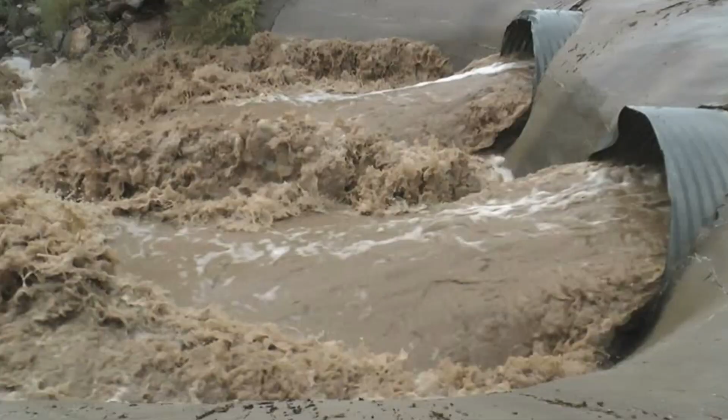The rain starts somewhere. We know it rains, it hits the ground, and it's going to go somewhere. If that's not controlled, there are problems. The steps that have been happening through erosion control have been phenomenal over the last 15, 20 years. But sediment control must be addressed too. The more dirt there is in the water, the more erosion that can happen, the more erosion control that is needed. Over the last few years there have been increased guidelines and regulations in the industry where we have to do better, we have to do more.

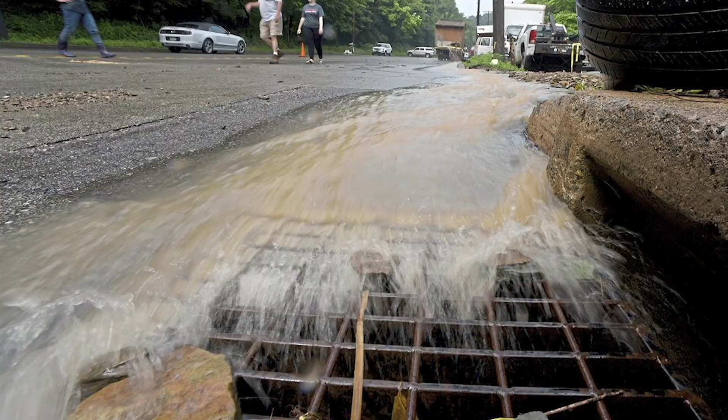Aside from the crying need for greater and cleaner stormwater control practices, sediment is the largest single non-point pollutant and the primary factor in the deterioration of surface water quality. It causes clogged stream channels, increased bank erosion, meandering and flooding. Sediment reduces the storage capacity of reservoirs. It destroys wetlands and degrades the quality of water for municipal, industrial, and recreational uses.

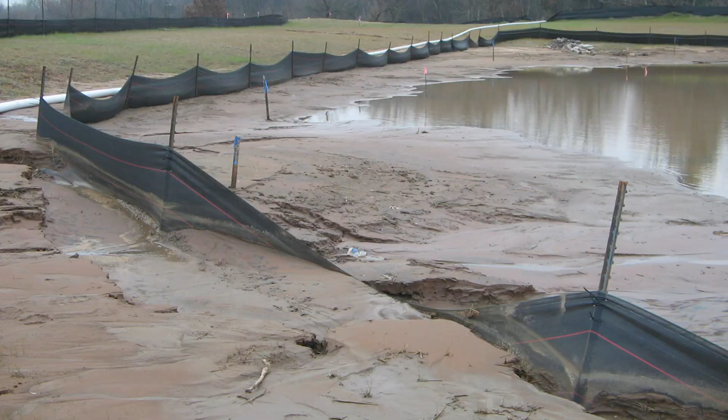Clean gravel stream beds become muddy bottoms. Native fish, insects, animals, they disappear. Turbidity and suspended solids are toxic to aquatic organisms. Oxygen-producing plants die off. Water temperatures increase. These are some of the attempts that have been accepted and approved that are in place following larger storms and stuff that they can't handle. So we've done a lot of great things to a point. The cry and call now is we need to go more.

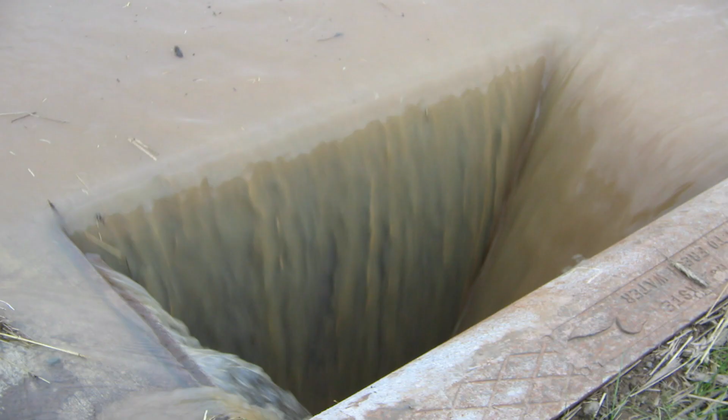This was a concrete washout that was left uncontrolled going into an inlet protection. We put our undergrade inlet EZ Catch system in there and took care of the turbidity. You'd still have to deal with the pH, but we now have a concrete washout system where you can treat the slurry and release it on site clean.

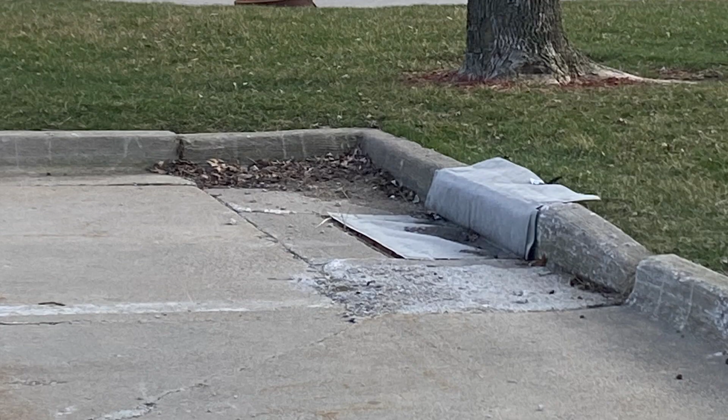You have to retain your stormwater. You have reservoirs, you have basins, etc. Once you've successfully retained your stormwater on site, you have the high NTU levels, the phosphorus, the nitrates, and other additives that are in that. So we need to clean that before it gets there, or you have to keep dredging it out, creating more and more space and room for your products. That can be done through my products with the sediment control factor.

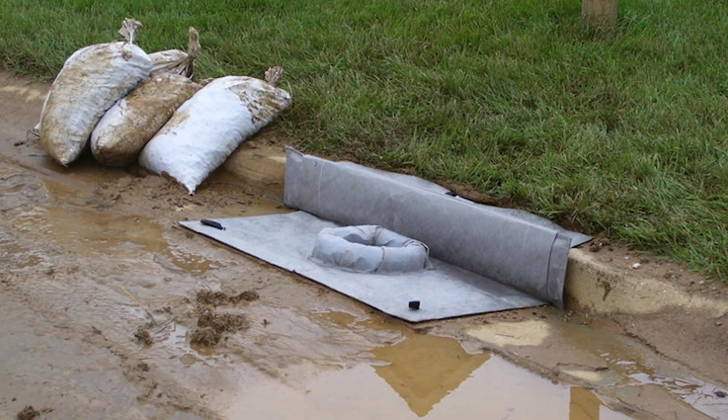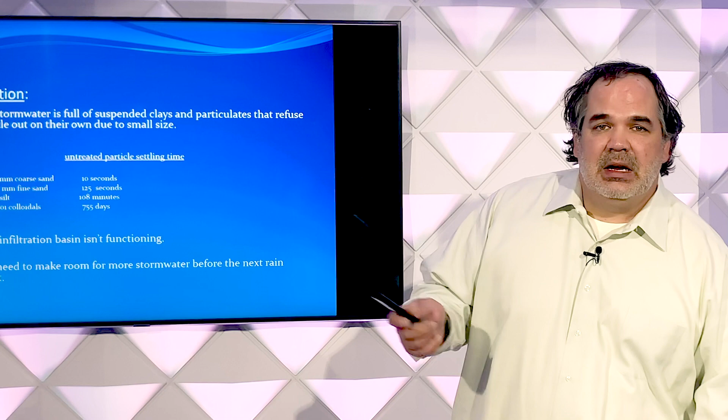You can combine flocculants and chemicals and other things to make it settle better, but that is something done at the engineer level. Your stormwater is full of suspended clays and particulates. They all take a different amount of time to settle. And then when it rains, et cetera, it's going to resettle and resettle. So if we can keep it out of there, again, it's greater for the impact when it keeps going on to our bodies of water, rivers, lakes, and streams.

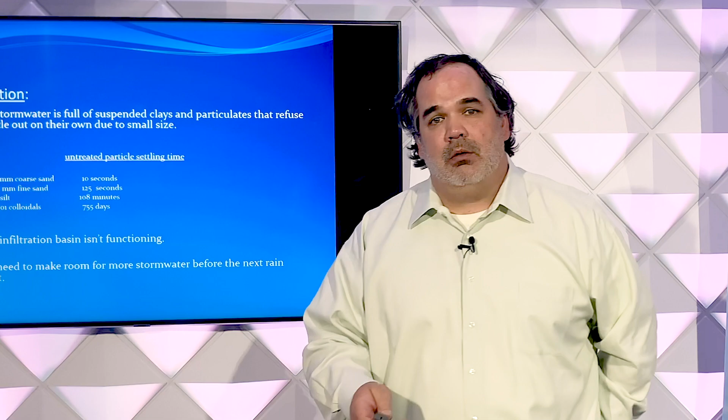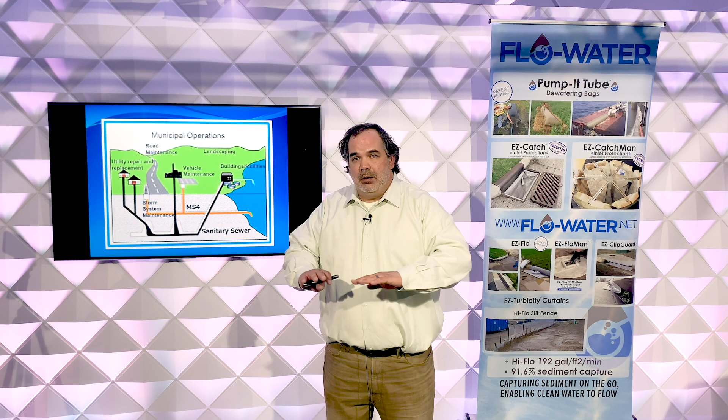Municipal operations. I'm going to get into post-construction solutions where you can protect your underground infrastructures that we're all spending millions and more on from having to get cleaned out as much and repaired as much, on top of keeping that out of the bodies of water, et cetera, where it's ultimately going to go when you get larger rain events and they go over those flood protection walls.

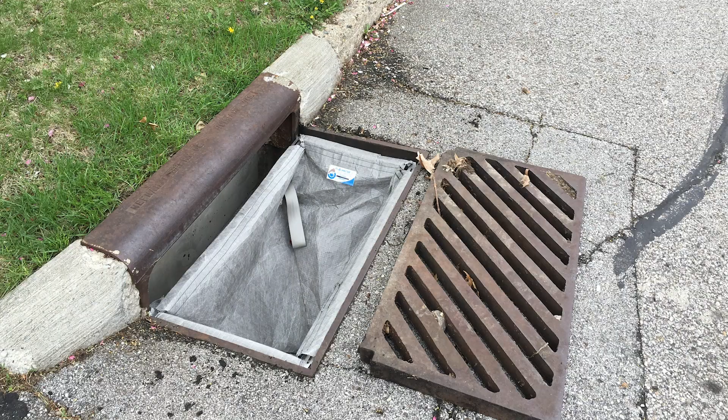Below-grade inlet protection. Flo-Water's EZ-Catch Inlet Protection is our patented products that adjust. This is our EZ-CatchMan. It handles manholes, beehives, et cetera, that are round. Two sizes handle from 15-inch in diameter to 37-inch in diameter. Adjusting tabs in the corners go between the grate and frame, so you're not rebuilding the grate, you're working with it. Reinforced straps you lift the bag out with.

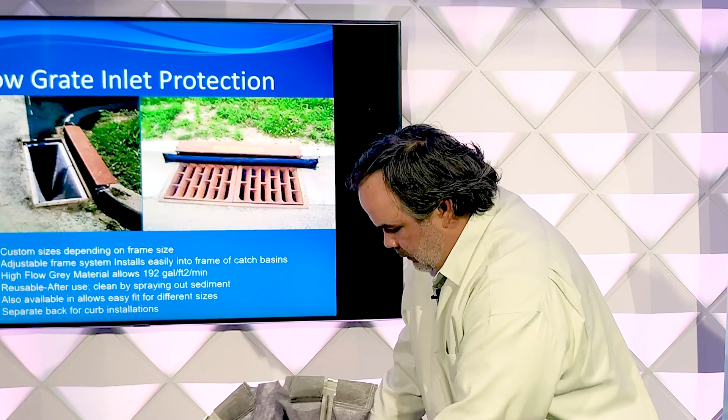You don't lose the frame even though they're 12 gauge. So you can reuse the frames again because these bags will Velcro off. There are overflows. So when you do get those big rains and you are catching more sediment, because we capture 91.6% of the sediment, you're eliminating that flood issue greatly.

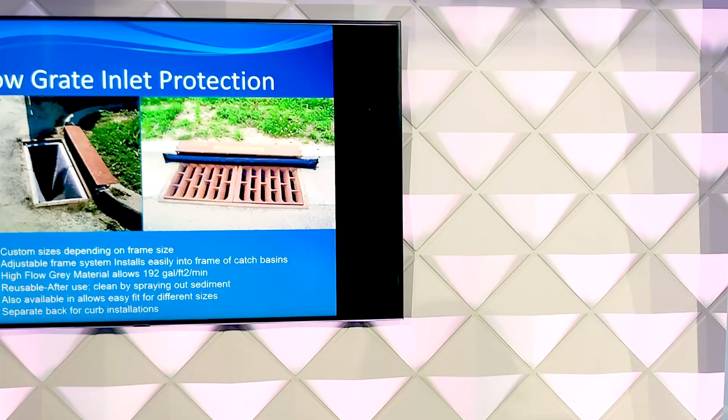This is our EZ-Catch 1. Square rectangle grates. They adjust both ways. Again, overflows in the corners. Reinforced straps for lifting. Velcro the bag off, reuse the frames after 16, 18 cleanouts, once the fabric gets soil laden. This size, our EZ-Catch 2, handles the 18-inch by 34-inch up to 32-inch by 48-inch. So you can get your 2x3s, your 18-inch by 36-inch grate. Two sizes are going to handle 90% of your grate sizes. 192 gallons a square foot a minute.

91.6% sediment capture. Pretty impressive. It's completely under the grate. You don't have anything sticking up.

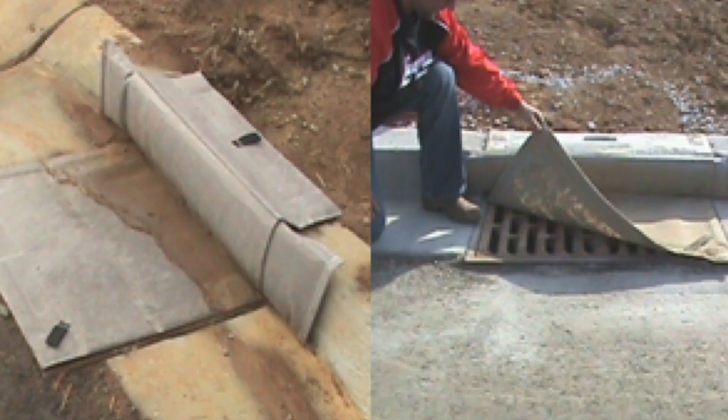Then we go to our EZ-Flo and EZ-FloMan on top magnet inlet protection. You don't have to tie it down. You don't have to lift the grate to clean it off or install it. This is a small sample size of our EZ-Flos. You got magnets in the corners. You've got a synthetic material in between that suctions down when it's wet to work with those magnets to seal, so everything has to go over and through.

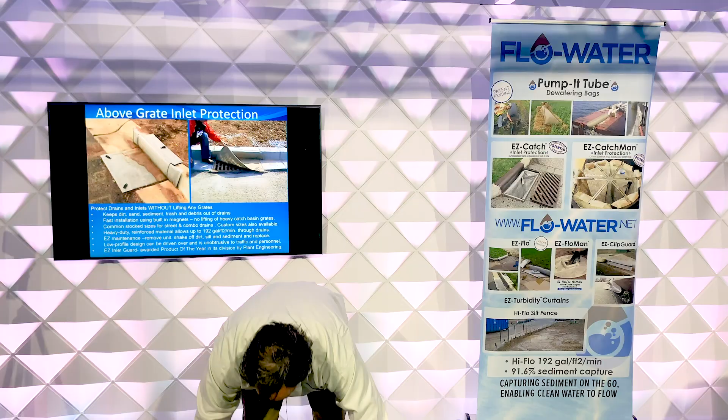You also see a sample of what our overflow would look like. So you can catch the sediment, but if maintenance isn't done like it should be, which we all know can happen, it will escape through so you don't have those flooding issues. This is a larger sample. EZ-Flo with curb, like you're seeing on the screen.

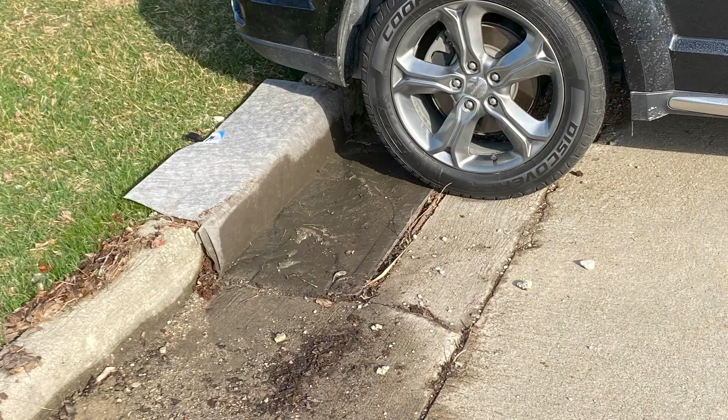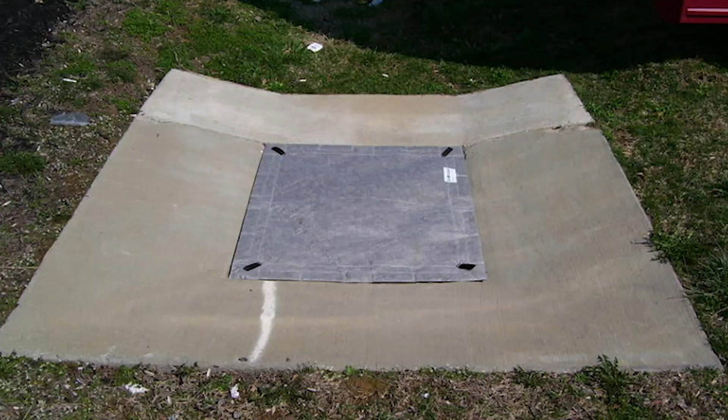So 192 gallons a square foot a minute, 91.6% sediment capture. You can drive over it. Maintenance is very easy. You can backwash it, you can vac it, you can shake it out, just depending on how long you want to keep reusing it. Our EZ-Flos were also rated #1 by Con Ed in New York at keeping the silica out of the inlets when you're cutting concrete, which, as we all know, is a federal regulation.

Along with the improved flow rates and sediment capture and the other positives I mentioned, these things are magnets. They're strong. They're not going to go anywhere. As long as you have a grate, it's going to hang. It's going to lay flat and hold in place.

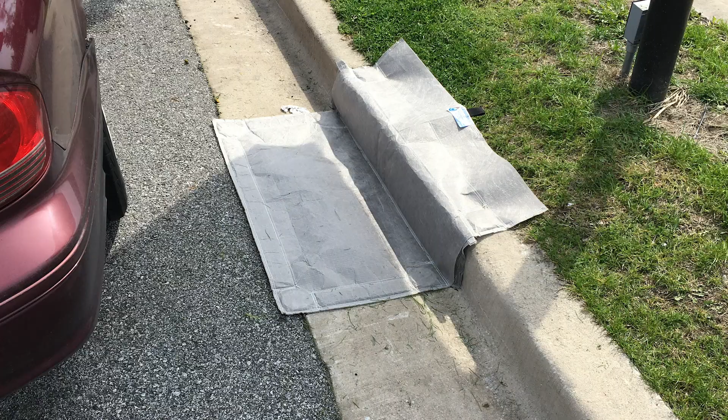Now, performance great, but look at the curb appeal. Much better looking. You don't have sandbags or rock bags or cedar chips, etc., that when they get broken, they're going down your inlet system anyway. You have something that's much better performing, better curb appeal, reusable, and aesthetically friendly. This was in Urbandale, Iowa.

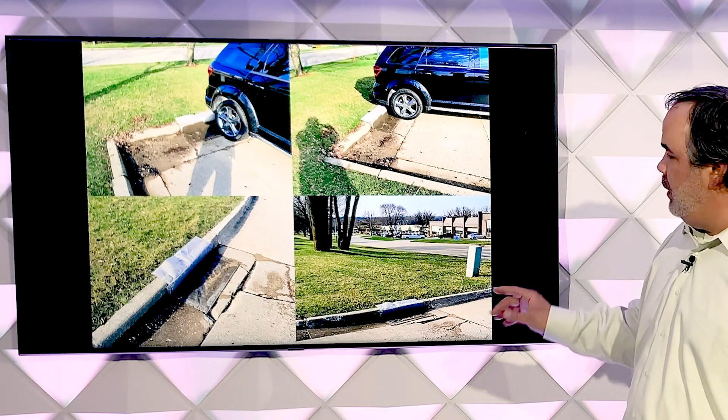This was right after install on the two. This was after the first rain event, which happened that night. Then we had a huge gusher, and you can see how much sediment it kept out and kept building, so you can clean it out instead of it going in your underground infrastructure system.

This was an industrial complex. They had 30-some inlets that they had to protect while they were doing work there. And to lay sandbags around it, or sediment logs, or wrap it in a geotextile, etc., would have taken them 3.5, 4 hours. Took them 40 minutes with ours. They just went, set it in place, went to the next one, set it in place, went back and checked it, and we're ready to go. And you're not reducing their footprint because you're leaving space for them to drive over it instead of driving around it. Much easier and better performing.

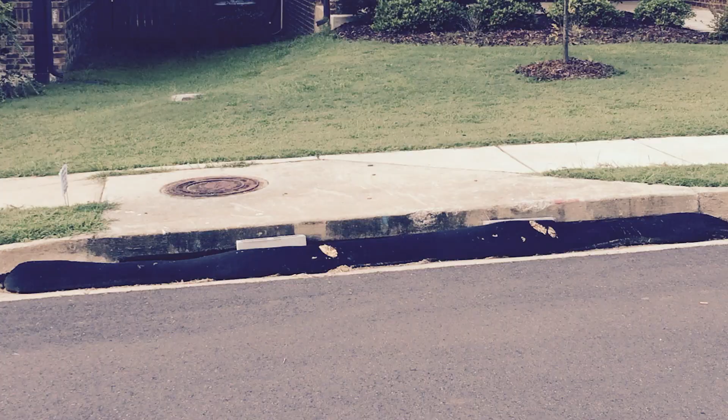This was at the Muddy Water Blues event down in Mobile, Alabama. It was an event where they had inlet protection in place that had suffered damage. That material is going to come up and out when it rains and it goes over like it does. They've put a concrete block in between the solution and the curb so it wouldn't cave in. And if it rains too much, the step you do is to go move that so it doesn't flood.

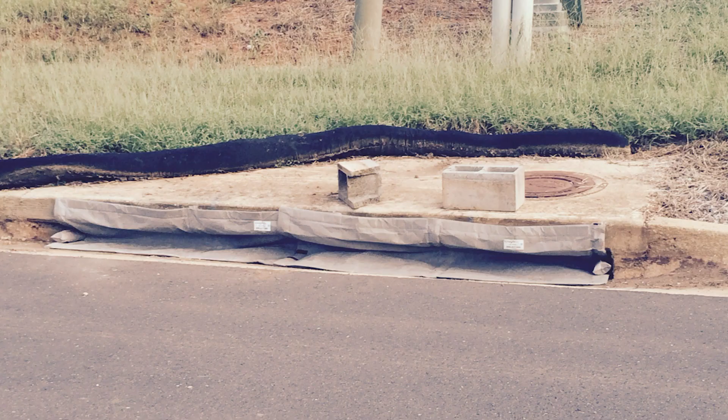On the other side, we put our EZ-ClipGuard. They're metal S-clips. They recess in the inlet. You have overflows on the sides. 192 gallons a square foot a minute flow rate. Fills up with sediment, pull it out, backwash it, put it back in. It gets soil laden, you can't use that fabric anymore, then slide the metal S-clips out, replace the fabric and reuse, keeping your costs manageable.

Metal S-clips. If you want to bolt it in place, you can, but you don't need to. Reverse clip into place, bend when it hits the street. You have the material in between that suctions down when it gets wet. Solution done. And as you can see, from a performance standpoint, it's nice because you're keeping their footprint manageable. You're not taking up a lot of room out into the street.

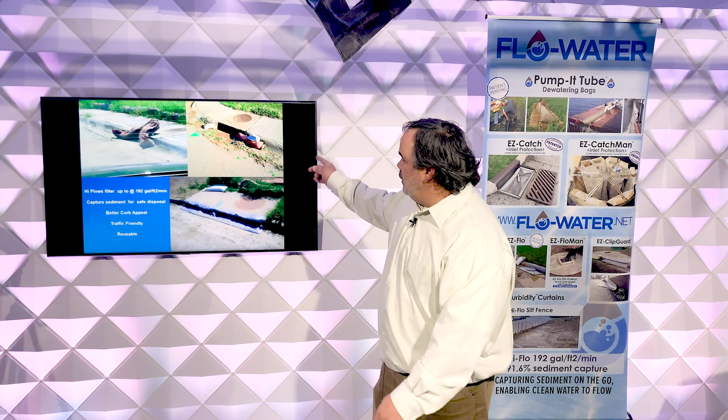You're going to perform. You don't have some of the failure issues you can have with current solutions when larger rain events happen. And yeah, they may handle up to a certain 50-year storm, 10-year storm, 15-year storm, 100-year storm, but those are happening every 4 or 5 months, it seems. Very good looking product, reusable, higher flow rates, greater sediment capture. Which would you rather have?

Our Hi-Flo Silt Fence and Max-Flow Silt Fence are doing really, really well as far as increasing flow rates when you want to let clean water through, but you don't want that dirt to leave your hillside or your slope or next to a riverbank or a stream bed or wherever it may be that you're trying to protect that valuable water that we're all worried and concerned about.

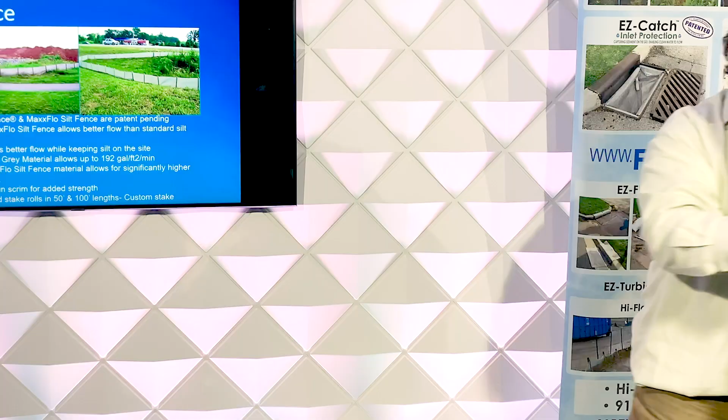So our Hi-Flo Silt Fence has 91.6% sediment capture, 192 gallons a square foot a minute flow rates. Because of the built-in poly scrim in our fabric, you get reinforced structural strength, so you can take advantage of those high flows and the high sediment capture without it bursting. The fabric goes between our 2x2 by 48-inch stakes with our 24-inch wood lath, and they're spaced every 6 feet apart.

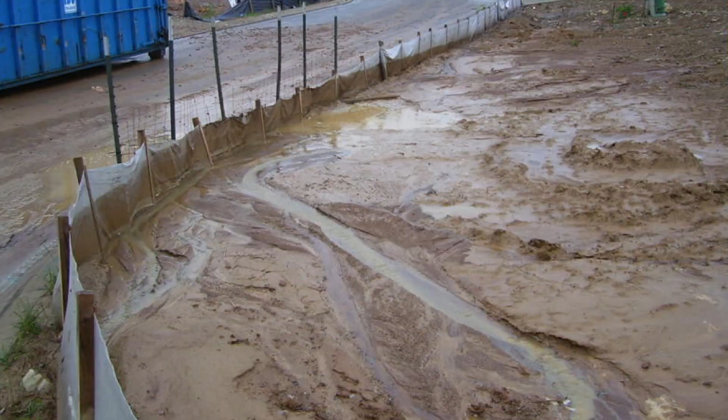That's advantageous because you give more room for it to filter and flow. You're letting the clean water through, you're stopping the sediment. As you can see here, that dirt and flow got pretty high. It caught the dirt, let the water through. But they had zero BMPs in place upstream from that.

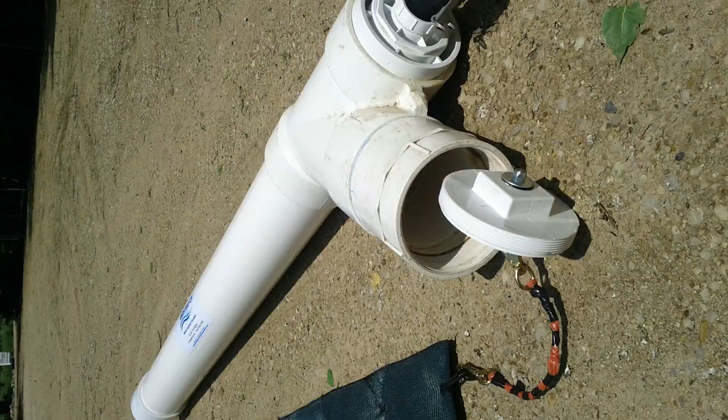Dewatering and dewatering bags. That need is great. We have a lot of stuff in our water that when you're moving and transporting water or cleaning water, lakes, lagoons and ponds, you need to capture and keep out of that. This is a floc inducement PVC Y tube done where you can induce chitosan or polyflocs or other chemicals to deal with waters as they're coming through if they exceed the need when our 91.6% fabric is doing its job.

This is one of my business associates with his chitosan flocculant inducing it into our PVC Y tube. This was in Bettendorf, Iowa at their public works facility. Dug in a trench, they had over 1,200 NTU water. The higher the NTU, which is nephelometric turbidity units, the dirtier the water. They want it below 280. That's being argued in the courts as we know, but our fabric will do that on its own.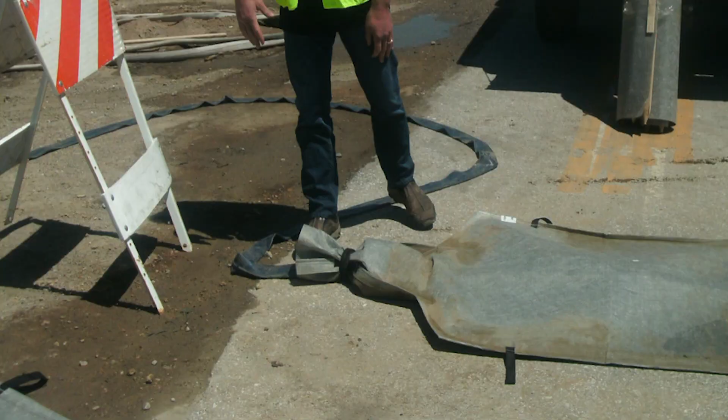If you have other chemicals in it or clay and you don't want a little bit of an orangish color, then you can add flocculants. But again, we will capture that percentage. That's our 40-inch by 5-foot dewatering bag. Normally on that hose, you'd be 10-foot by 15-foot. Again, our flow rates are 192 gallons a square foot a minute.

The standard in the industry to this point on the big black geotextile bags is 80 to 84 gallons a square foot a minute. And they balloon up and seep out while the sediment gets kicked around continuously on the inside. Whereas our Flo-Water Pump-It tubes are designed like hot dogs or 2-liter bottles so that flow's going through, pushing the sediment to the back while the water is released continuously. And so you're able to handle larger pumps and hoses with smaller size bags.

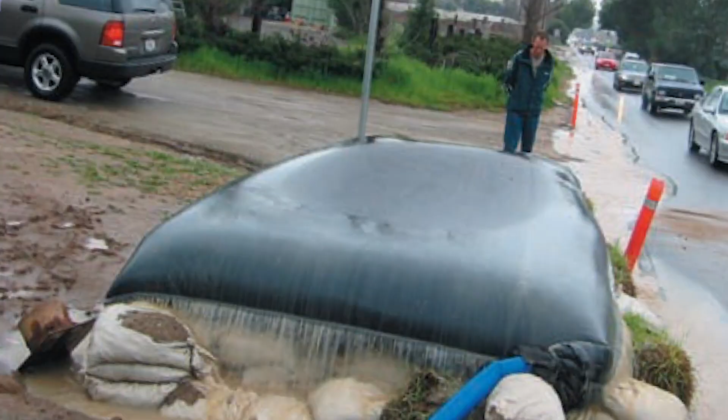This is the industry to this point, the standard 10-foot by 15-foot bag. It's ballooning up and seeping out. This is our 20-inch by 5-foot bag that will handle a 2-inch and a 3-inch pump instead of 6-foot by 6-foot or 10-foot by 15-foot currently needed. They hook with a D-ring and a strap as opposed to the other adhering mechanisms and ways that have been created throughout the years to be used with the other bags.

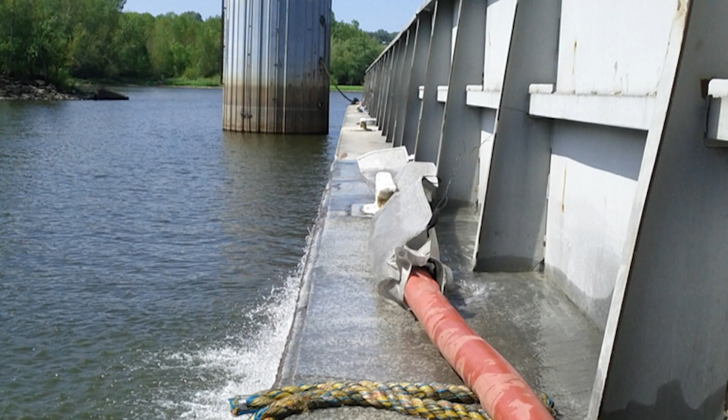This is in Stillwater, Minnesota when they were replacing the bridge over the St. Croix River there. Our 40-inch by 20-foot bags on the side of their barges so they could treat the water and have it go straight into that body of water, clean, approved. We have reports from DNR, EPA, DOT, the list goes on. And it's a pretty remarkable solution that brings you a lot of advantages.

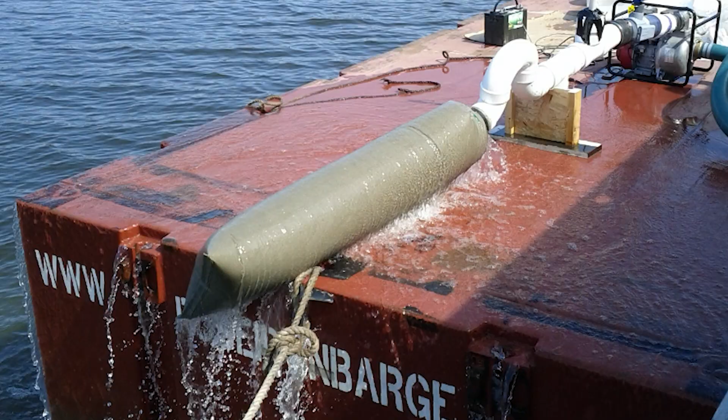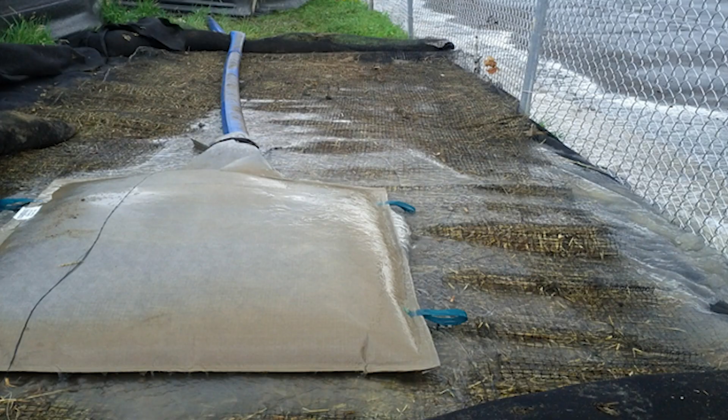This is coming off a rock quarry situation where they're pumping water. They put it on the hay bales to elevate it. Again, 192 gallons a square foot a minute. The more fabric you give the flow, the greater the flow volume. Ideal situation where if you need to go faster but you need to keep your bag smaller, put a manifold on your pump and split your hose into 2 or 3 or 4 or 5 hoses and have your bags split out. So then you're filling them up 50, 60% because you're giving it more space to work with and your bags are easier to transport.

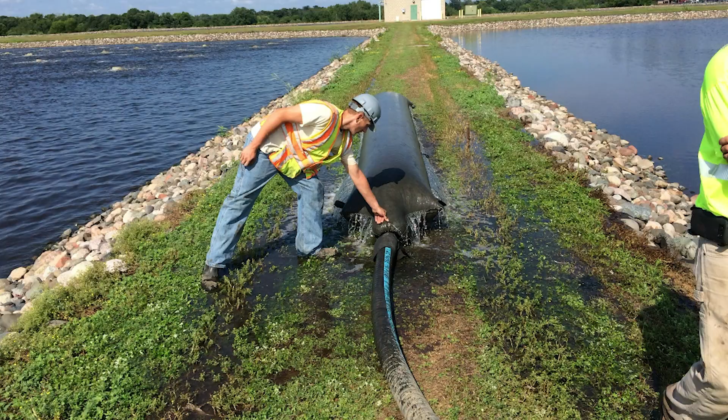That's a bag running, seeping out all the way around while the sediment's being pushed in. Waterworks facility, draining 3 ponds into a 4th, dredge them, clean them out, get them ready again, and then drain it back, filtering both ways. We do dewatering bags, inlet protection, silt fence, concrete washouts, other things, but my main concentration is the dewatering bags and the inlet protection we'll discuss later this afternoon. Our bags flow 192 gallons a square foot a minute compared to the 80 or 84 of the woven or non-woven that's been the standard.

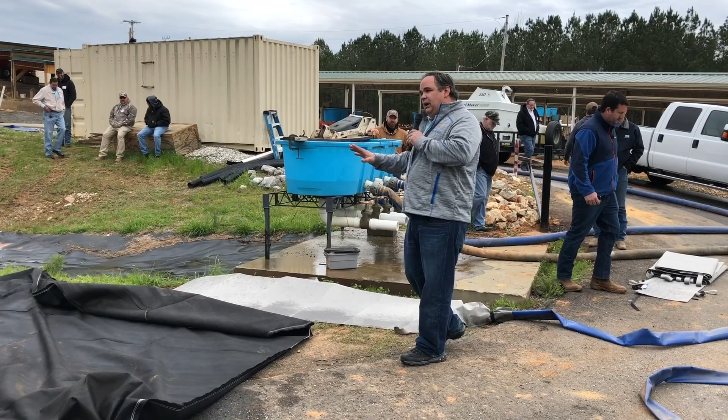Ours capture 91.6% of the sediment instead of 80 or 84%, depending. The built-in scrim gives it the structural strength so you get the high flows and the high sediment capture. I'm going to run a 40-inch by 10-foot on a 4-inch pump, and we all know that'd be 10 by 15 normally on the others. And I'm going to switch it and put a 20-inch by 10-foot so you can see how small you can get with these. Reduce your footprint.

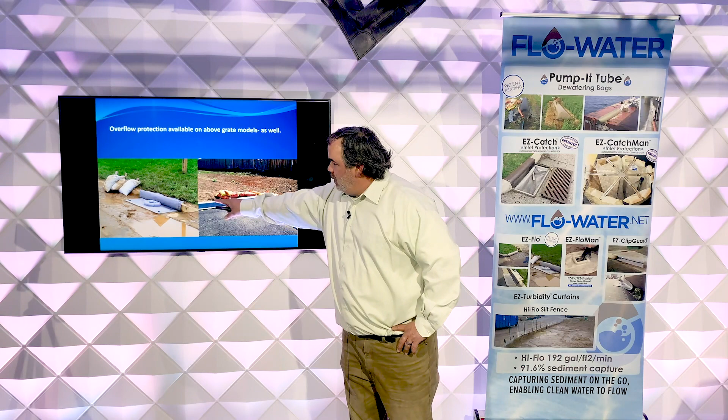Another key is in lesser footprint, you can put a manifold and run 3, 4, 5 at the same time. If one fills, turn it off while you rotate it. The others keep running. So you've sped up the jobs and you've just eliminated their downtime while reducing footprint on site. Again, our EZ-Flo and EZ-FloMan inlet protection. You see here with curb and overflow, here with curb. This is just with overflow.

It's doing its job. If you don't see the dirt at a drain, that means it's in the drain. That means it's on our way to where we either have to pay more to deal with it, we're paying for underground infrastructure, clean outs, repairs, or remedying the water where it's going. You can have better curb appeal, have it work, drive on it. EZ washout pits.

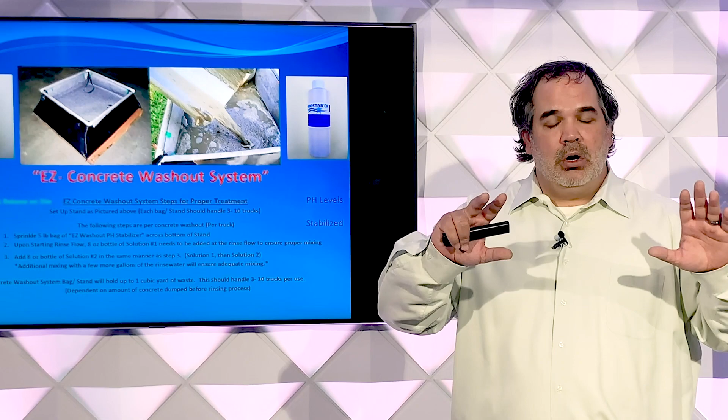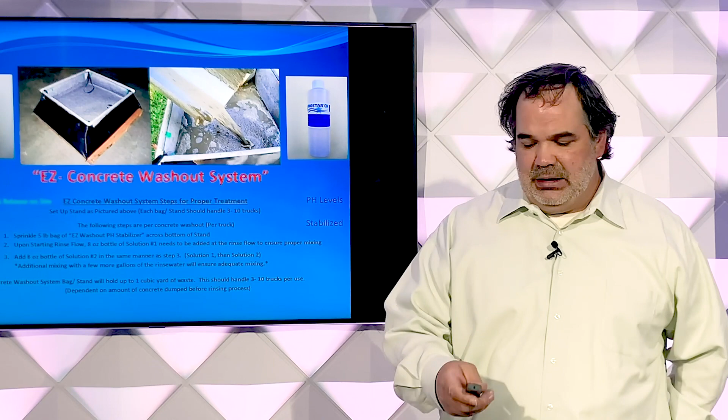Our system's a pallet-sized one now, but you must add chemicals. You have an 8-ounce bottle of chitosan, an 8-ounce bottle of a Bridger flocculant, along with a 5-pound bag of pH stabilizer per pallet size Easy Slurry. Per concrete washout that you're cleaning out, you add a bottle of each of those liquids, and the pH stabilizer is handling 3 to 10 trucks before you're going to have to take that out and bring a new one in. But then again, your water is treated, released on site, and clean. Ideal for those urban areas where you don't have a lot of footprint.

We do custom solutions quite frequently. This is for a pedestal wrap, Velcroed around. This would be for a beehive grate. Looks like a top hat goes on and filters. We have DOT approvals, DNR approvals.

These guys just want their water back. Clean water where they can hang out. They're so sick of the man-made structures and our infiltration into their zone, which in effect is affecting our lives with the water and the global warming, etc.

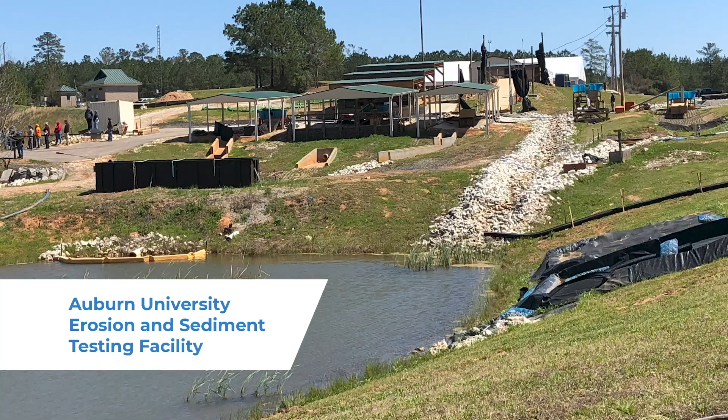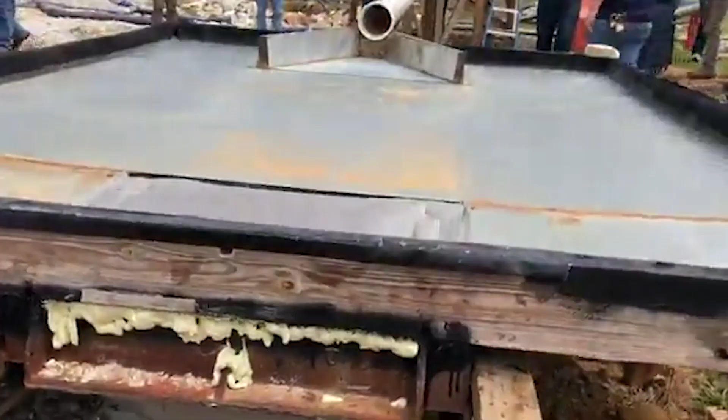So now we are going to look at the Auburn University EZ-Catch, EZ-Flo dual municipal system for non-construction. As recapped before, you will see the EZ-Flo on top, the EZ-Catch adjustable frame undergrate beneath. Now this is for non-construction. Mine also works for construction, so you can deal with the construction site sediment as well. Obviously you have to clean it out more when there's more sediment in it. The new regulations, check it every 2 weeks or every big rain event.

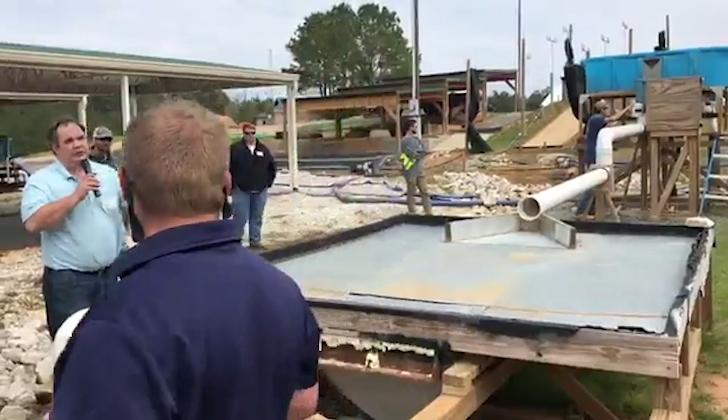In non-construction, you would rotate these maybe every 2 months, 2.5 months. So cities are looking at doing it to protect their underground infrastructure where they're pouring millions into. So you get them to spend that much money, why not protect it? And the whole adage of keep grass clippings out of the inlet, keep trash out, etc. That all works great when it's working. When it doesn't, you can't have a better safety net is the way we look at it. So as you can see there, it handles all the flows you would need and it goes well beyond what their testing was set up to do.

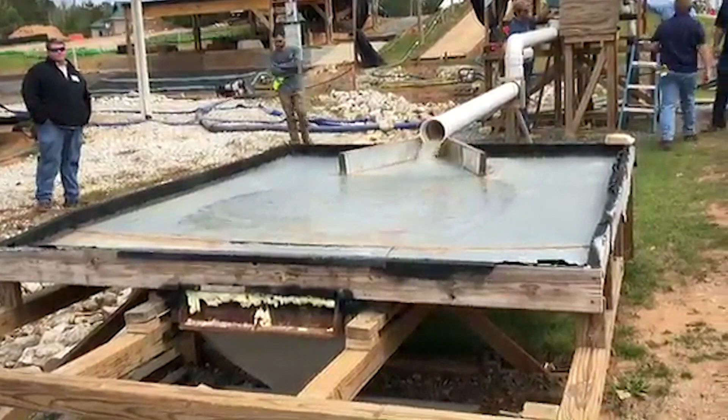The returns on investment for this dual system, municipal EZ-Flo, EZ-Catch inlet protection system are a lot. But to name a few: you get cleaner stormwater, if you're doing it in all your storm drains throughout your municipality or your area that you're controlling. It's a proven system with higher flows, overflows, and greater sediment capture. Facilitate specifications with maintenance schedules. All Flo-Water specifications have maintenance schedules built in. You can't ignore maintenance because that's a missing key piece in a lot of the approved systems that are out there now.

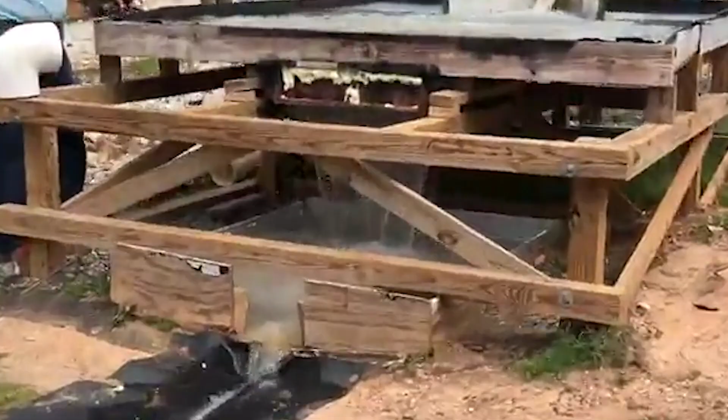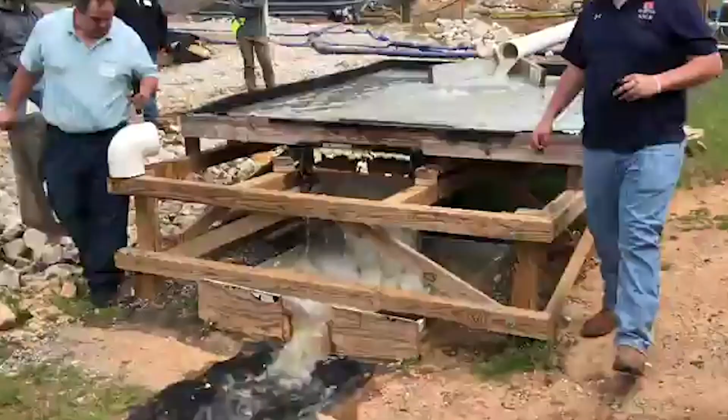Financial: reduce maintenance and repairs on underground infrastructure systems. The limbs, the rocks, the sediment, and more trash that are going down there that we're stopping. Drastically reduce the frequency in which underground infrastructure systems are cleaned out. Compliance with new federal regulation. Lower construction costs within the territory. If you already have it in there, the contractor isn't paying for that, which isn't passed to the end user, but it also is being done right with more control and a greater eye on it.

This is why we feel the EZ-Flo, the EZ-Catch, the Easy Clip Guard are ideal inlet protection systems to be used whether it's for construction, post-construction, industrial, manufacturing, or ag industry, dewatering and inlet protection situations. Our Pump-It Tube Dewatering Bags are proven to be faster, take up less footprint, capture more sediment, and easier to move. And you can again eliminate downtime.

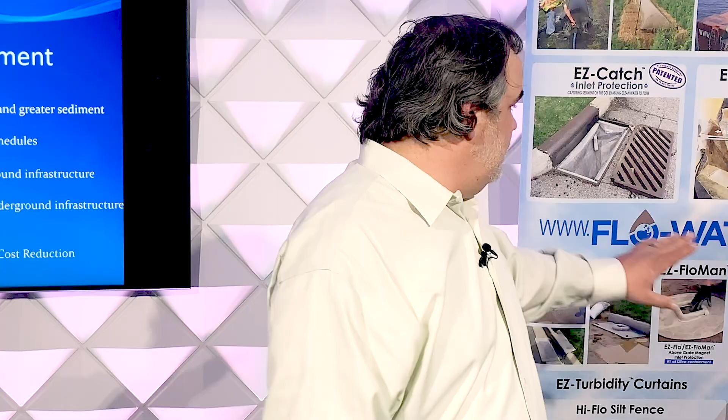So turbidity curtains, yes, I've had that on some of my slides and on my brochure here. They work wonderfully, same flow rates, etc. We can do them in 3 foot, 6 foot, 9 foot, 12 foot, 15 foot depths. Ideal for shoreline restorations. Ideal when you're putting in bridges, cofferdams, etc., to work and benefit with the other BMPs to keep that water contained on the shore. You combine that on that end and have our Hi-Flo Silt Fence up here, well, that area is protected.

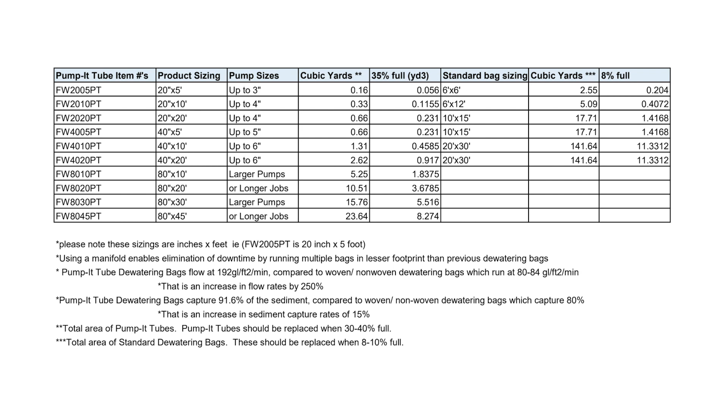What size do our bags come in? Our Pump-It Tube Dewatering Bags: 20 inch by 5 foot for 2 and 3 inch pumps. 20 inch by 10 foot or 20 foot for 2, 3, and 4 inch pumps. 40 inch by 5 foot would handle 2, 3, 4, 5 inch pumps. 40 inch by 10 foot or 20 foot would handle up to 6 inch pumps. And then we have our 80 inch by 10 foot, 20 foot, 30 foot, or 45 foot for larger project jobs. And those will handle up to the 11 inch pumps now, but if you need them for larger pumps and you're going to use them with manifolds, we can facilitate.